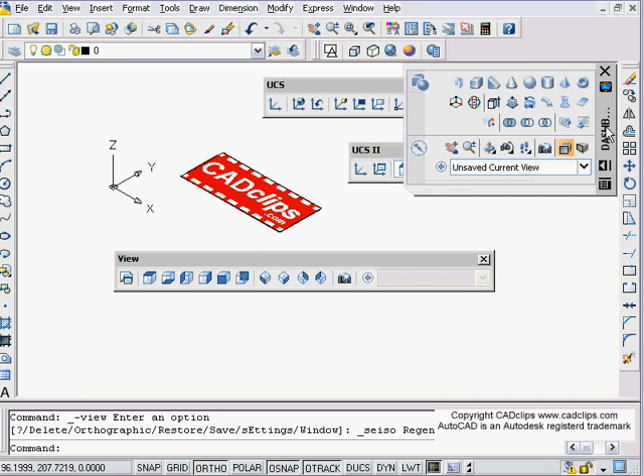Now, one thing of note in our View toolbar, I'm going to go to a 3D view here. And then I'm going to put myself in perspective because it's kind of fun. And I'm going to maybe turn my grid on. And I'm going to draw some shapes, some objects inside of here, and change that to be whatever display I want.

And as I'm drawing, notice where my X and Y is right now, on the bottom. If I draw a circle right now, I'm drawing down inside of here. Well, if I want to draw something on the side, when I change my view to be top, right, left, etc., it actually changes my UCS while I do it, and that can help clarify some confusion.

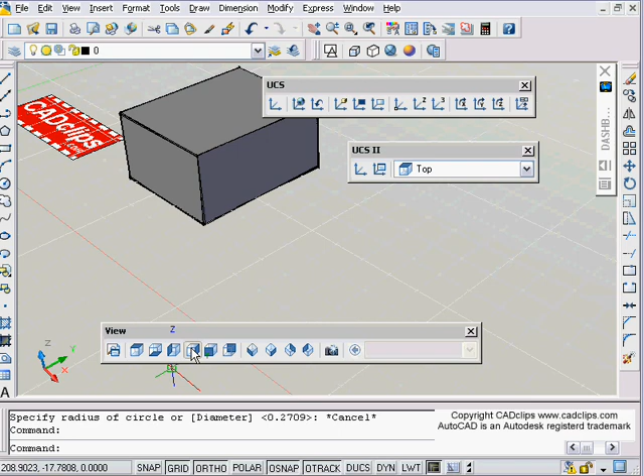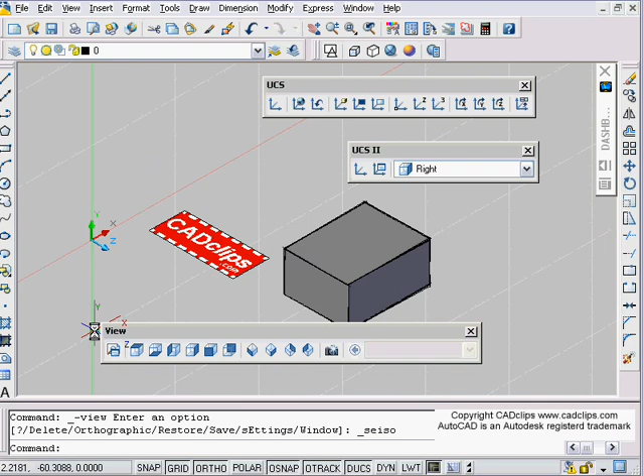Watch how my X, Y, and Z are here. Now, if I go to the right-hand side, I can see that object like this, and I don't have to be perspective. I can be just straight on. Notice how my X and Y are now pointing at this surface, and especially with my dynamic UCS, of course, that alleviates a lot of our problems. But watch what happens. Here's my X and Y. Now if I go back to my 3D view, my X and Y stayed up, as you can see, pointing up on that surface.

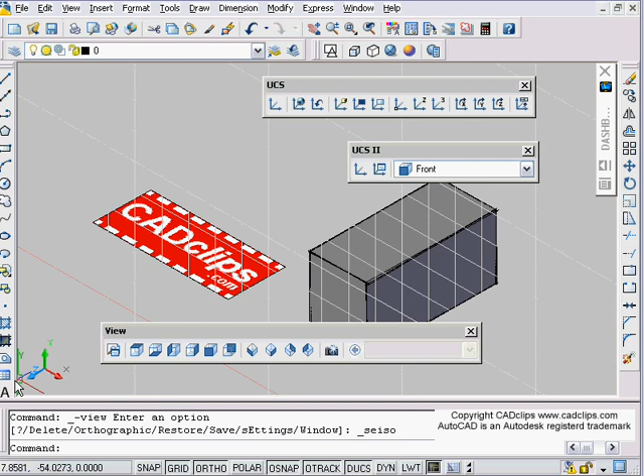Now watch what happens. I'm going to go to a front view looking at the narrower side. I'll look from the front, and now notice my X and Y are pointing towards the front. I can draw, etc. If I go back to my 3D view, notice my X and Y with my Z coming off of that. And notice the grid too; the grid will also be a giveaway. So my point is, as you change between your different views, the isometric ones don't do anything to your UCS.

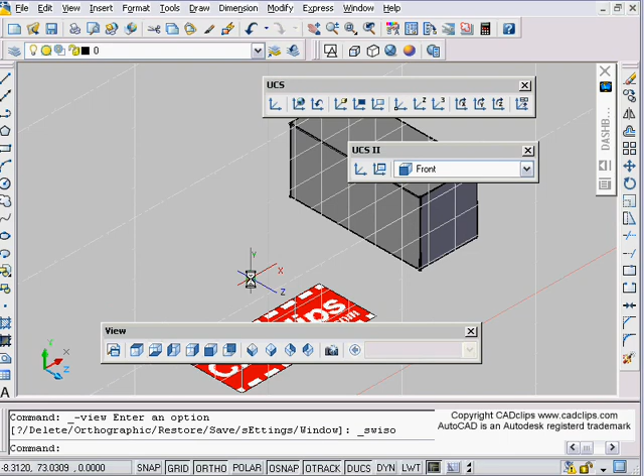But these ones will. So the other thing is you want to be able to just set your UCS back to be world. Watch what happens. I hit this button, and it is a macro that says UCS world. And there's a bunch more in here. UCS previous, which is like an undo, goes to the previous one. We can rotate about an X, Y, and Z axis, and that's all in our other videos.

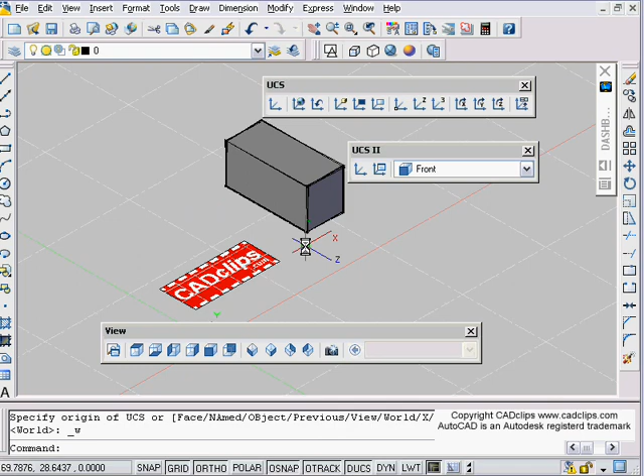And then we've got this one where we can say, move my UCS to be front. Now my XY is facing the front, which is over here, with my Z coming off of it. If I say make it be the left, now my X and Y is on the left with the Z going this way. And if I go to the right, now my X and Y is on the backside, more or less, with the Z coming off, and then back to world.

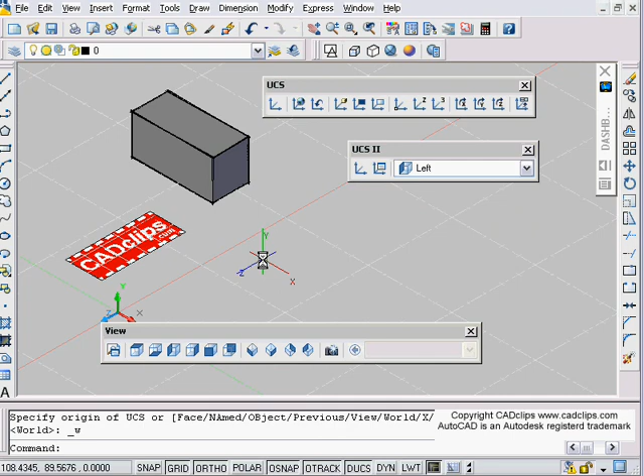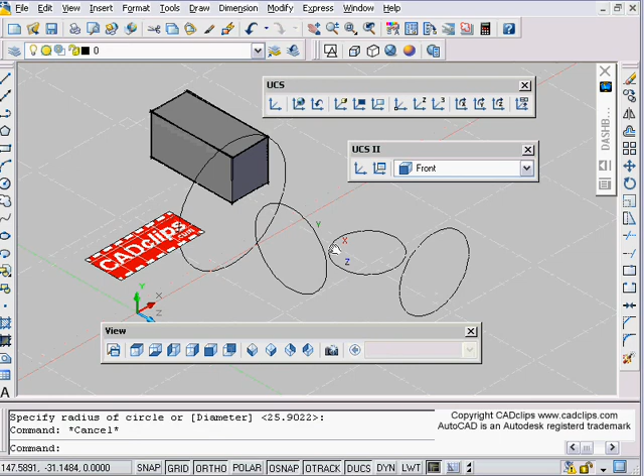So when you're drawing, that's what you'll want to do: you'll maybe want to go in and say, I want to be X, Y, left, and then when you go in and draw a circle, of course, now you're drawing a circle this way. Okay, if I go back to world and I draw a circle, I'm going to draw a circle this way. If I go to the front and I draw a circle, I'm going to draw my circle this way. Okay, and then you can tie that with an endpoint at the same time, and then you'll know you're right on that surface. All little things to do with using your UCS command.

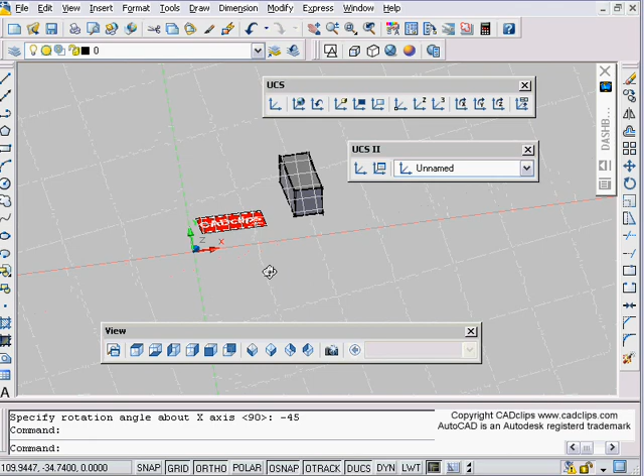Okay, the other thing is I can say I'm going to rotate about my x-axis by 45. Watch, I'm going to go up to here. I'm going to pick my X button and I'm going to rotate by minus 45, in fact, the other way. Okay, now I'm kind of skewed that way. And then if I draw a circle, it's going to be kind of on an angle like that.

Now I want to save that, so I can say UCS and then S for save, and then I can call this 45. Doesn't matter. Okay, now when I go into my named views, I'm going to see that 45, and I can say set current and hit OK, so you can save them.

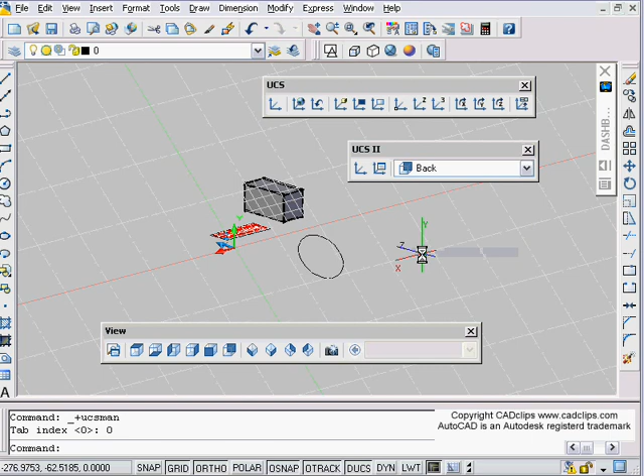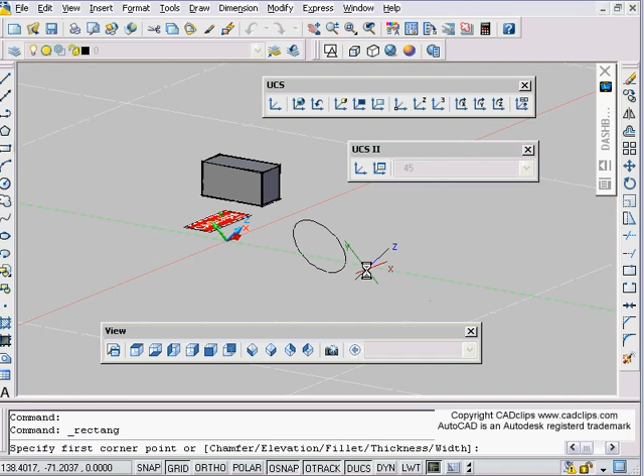Now I can say, okay, well, make my UCS be top or bottom. Notice the UCS icon changing. Doing a regen, maybe turn my grid off and on. There, I need to refresh my grid. Okay, back to world. Now if I want to use that UCS again, I can go back and say 45. Now I can draw another circle or rectangle or whatever I want, and I'm going to be on that same angle that I'm drawing on. And you can do that with, of course, your dynamic UCS all at the same time. So that clarifies that.

Now I was hoping I could save it in here, but I'm looking for a save button and I don't see it. Okay, settings, probably have a look inside of this. Read up on it a little bit. You can always hit help here and it'll go into the help menu only about the UCS command.

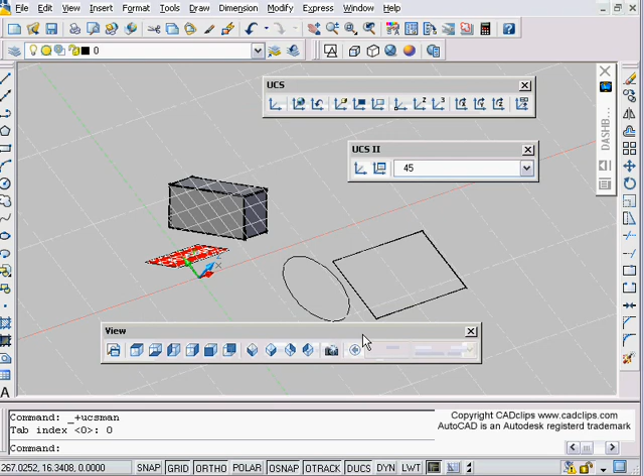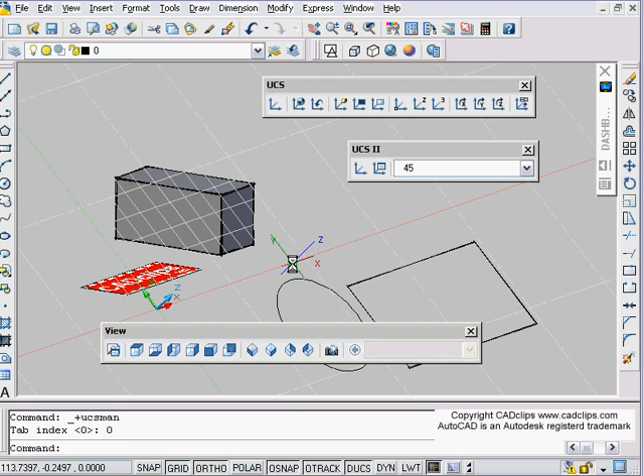The other UCS command that I always used when I was beginning, I thought was quite good, is the 3-point one, which is right here. What you do in this case is you give an origin, an X, and a Y positive, and it'll help you. So watch what happens. I'll turn my grid off here. I want to be maybe on that face. I can go 3-point, and it says origin, endpoint here. Positive X over here, positive Y up there, and bango, now I can draw right on that surface. And if I draw a circle, with or without my dynamic UCS, I can be on there.

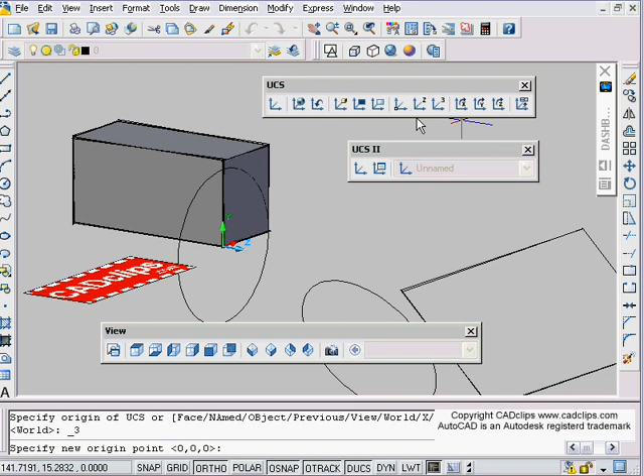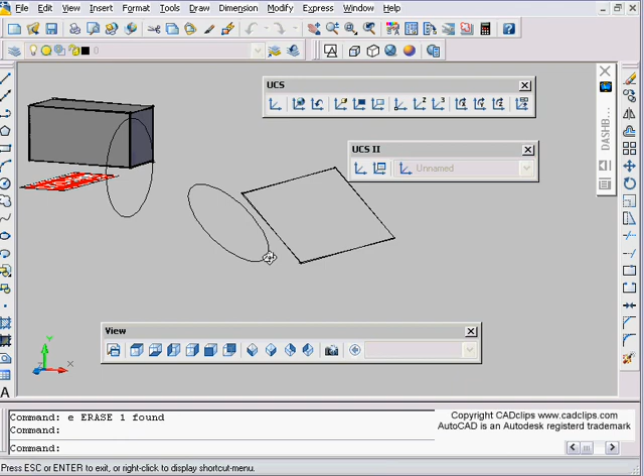Now I'm going to use my 3-point again. Origin is here, positive X is here, positive Y is there, and now I can draw on that surface. Again, with my dynamic UCS it really helps, but if that isn't turned on, we can do that. Same thing one more time. Maybe I want to be on the plane of this drafting board that I've drawn here. 3-point, origin, positive X, positive Y, and now I can go ahead, draw a circle. I know I'm exactly on that plane right there. Okay, so some different options.